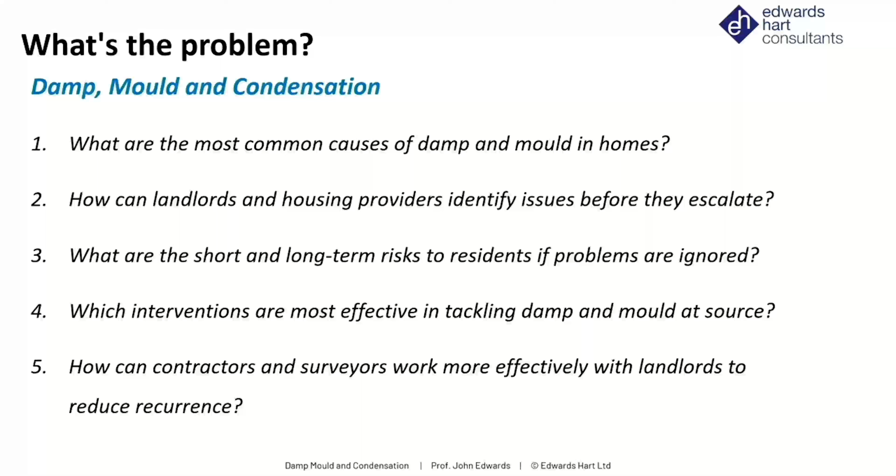We know it's a problem. It's in the news all the time. You don't have to look very far, perhaps every week, to find a new story about problems with damp, mould and condensation in buildings. I believe it's almost at an epidemic rate.

But it hasn't always been this way. Some people ask me when I saw it get worse. Well, it's always been around - it was around in the 1980s, but during the 1980s is when I saw it get worse. That was when we took out the old timber and metal windows and replaced them with plastic windows with draft proofing, removed the fireplaces, and installed a couple of fans. That's when I saw the situation get worse, and it's very, very bad today in many circumstances.

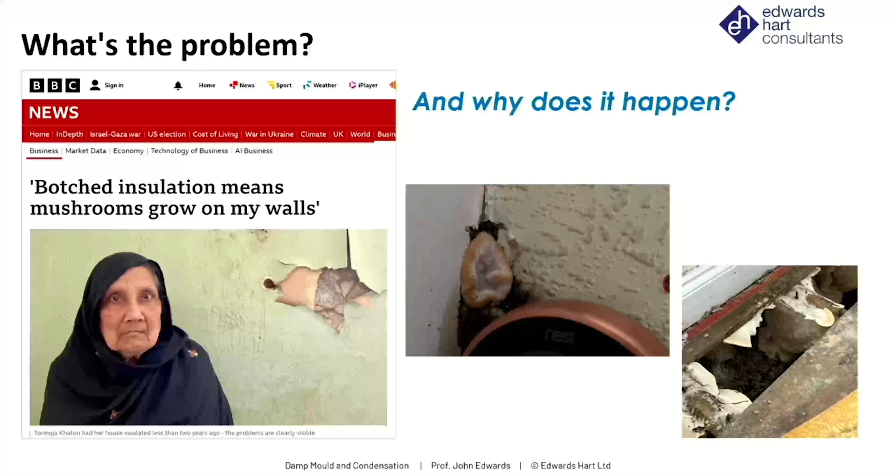This has raised the profile. This very sad death of an infant child has really raised the profile of this epidemic problem. This person isn't the only one to have died from mould issues, but it's the one that's really going to change things. It's bringing about a law that we call Awaab's Law.

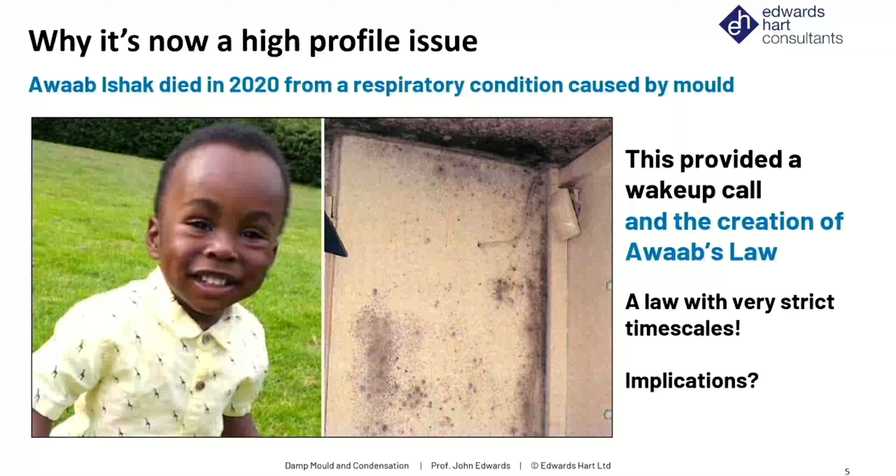Within Awaab's Law we have very, very strict timescales to comply with - or rather, social landlords have very strict timescales to comply with. And there are some implications for that. First, let's look at what these timescales are.

An investigation must commence within 10 days of the reported or known damp issue. A written summary of the investigation findings shall be reported to the tenant - it's almost as if the tenant is now the client - within 3 working days of the conclusion of the investigation. The summary must include the name and job title of whoever investigated the problem, so that person will most definitely be in the spotlight. It must also include details of any hazard identified, the next steps, an anticipated timeline for repair, and a schedule of works to be developed.

Relevant safety work must commence within 5 working days of the investigation's conclusion, and steps to undertake further work necessary to prevent hazards reoccurring should begin within 5 working days of the investigation's conclusion. But if this isn't achieved, it must be done as soon as possible and physically commence within 12 weeks. If the hazard is judged an emergency, work must commence within 24 hours.

Any work is required to be completed within a reasonable time period. And the last point is very important, I think. It's important to maintain accurate records so you can defend yourselves in the future, if you are a social housing landlord, that you've done what you can within the specified timescales.

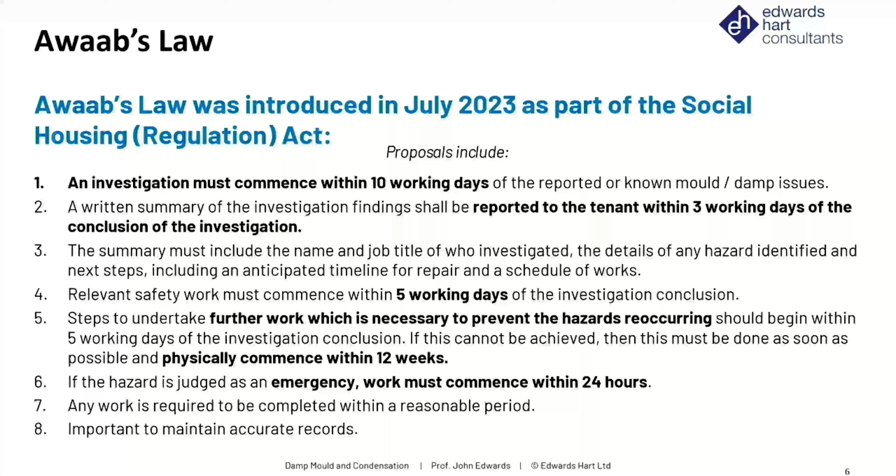So my conclusion from this, some people may have a different take on it, but the maximum timescale for initial work to commence is 15 working days from the hazard being reported. This does not have to be all the work necessary in order to prevent the hazard reoccurring, but this work must begin within 12 weeks.

Now, for many organisations, that is a very tight timescale. In fact, you could say that all of these timescales are pretty tight. Having to include the name and job title of who investigated the problem places great responsibility on the individual who has undertaken the analysis. It might suggest that should a dispute arise, their credibility and expertise will be under the spotlight. I would also say a qualification in the subject could assist in evidencing their credibility, and that's something I will talk about towards the end of this presentation.

Note that the initial reporting by the tenant could involve comments made verbally to anyone within the landlord's organisation, for example, maybe somebody servicing the gas boiler.

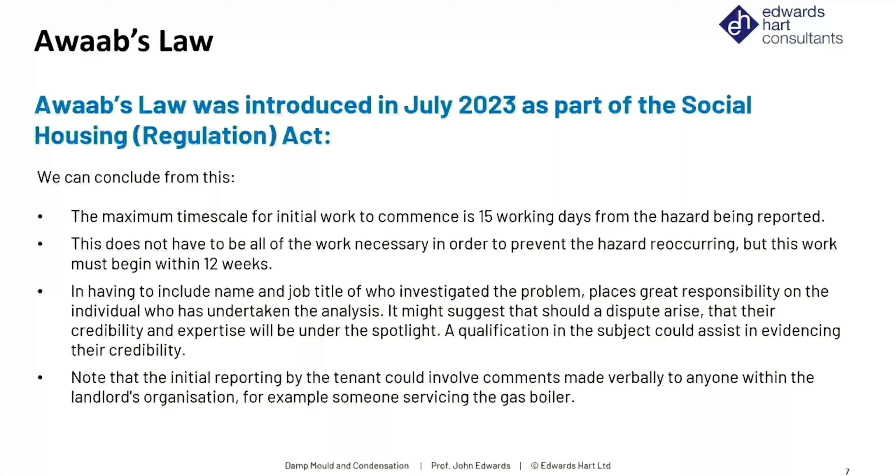But what is damp, mould and condensation? Let's try and break it down into finding out what it is. Number one, you could say it's moisture levels above the thresholds for each material type causing damage. So all materials in a building will have a different threshold at which moisture is a problem in terms of deterioration of that material or a lack of performance. That's something we'll come back to in a moment.

Number two, it could be penetrating through walls. Three, rising through walls and floors. Four, leaks through roofs. Five, leaks from pipes, drainage, and anything that contains liquids that leaks. And six, low surface temperatures leads to high levels of relative humidity. And if the relative humidity is 100%, then we're going to get condensation. But even if it's at a lower level, it could also be a problem in terms of mould.

That brings us on to number seven. Persistently high levels of relative humidity on surfaces increases the risk of mould. And eight, low heat, low temperatures inside buildings increases risks of low surface temperatures. And nine, a lack of ventilation generally in a dwelling increases the persistency of high levels of relative humidity.

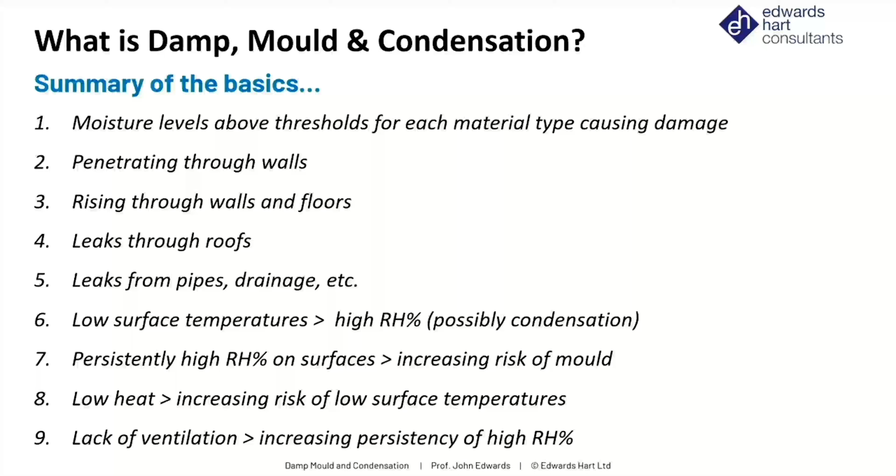So going back to that number one item in the last slide, I mentioned that different materials can cope with moisture in different ways. If we look at this table that is based upon a BRE document of a few years ago, we can read the column titled Materials, and then we can read the column titled Investigate the Cause. That indicates for timber that if you determine it has an 18% moisture content, that's too much, because that's the threshold at which moisture could be a problem.

But if you look down that list of materials, you find we got much lower threshold moisture percentages at which moisture is a potential problem. And if we go right down to the bottom, we see plaster is nowhere near 18%, it's 2%. Now we can only use this for guidance, only for guidance.

But when it comes to determining the amount of moisture present, then we need to use the right tools and equipment, which I'll come on to in a moment. For timber, we're going to use that 2-pin moisture resistance meter. But we're not going to use that equipment on any of these other materials because it will normally exaggerate the amount of moisture present. So for plaster, for example, we'd have to use a carbide test, which means extracting the material from the actual plaster itself and analysing it.

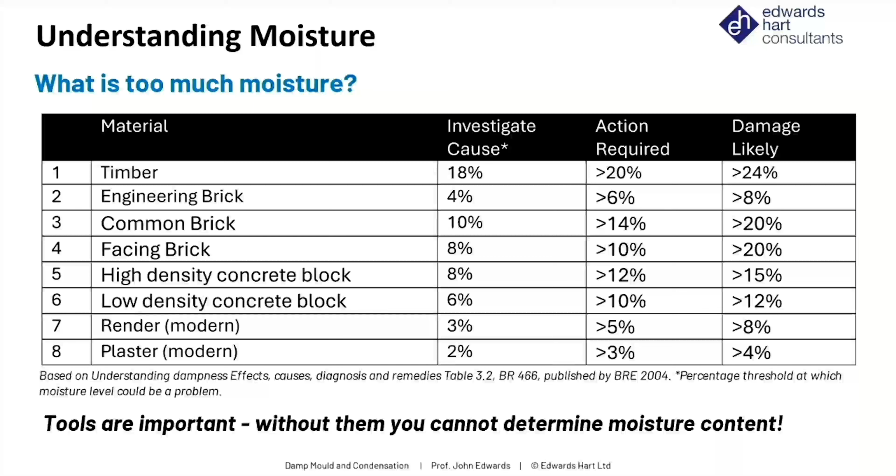The most important tool is you, the investigator, the surveyor - how much you know, what your expertise is, what you can see, what you can hear, what you can smell, tap, thump, stamp, what does it sound like? All of those things, plus using equipment.

But one piece of equipment that will be useful to you all of the time is the vane anemometer with a hood to test the fans. I'll give you an example of how important this is.

A good few months ago, myself and my colleague were doing a reconnaissance survey of many homes. It was supposed to be 100, but we couldn't fit it all in terms of our capacity. So we did an external inspection of the homes - this is social housing - and then we went inside 12 properties in a day.

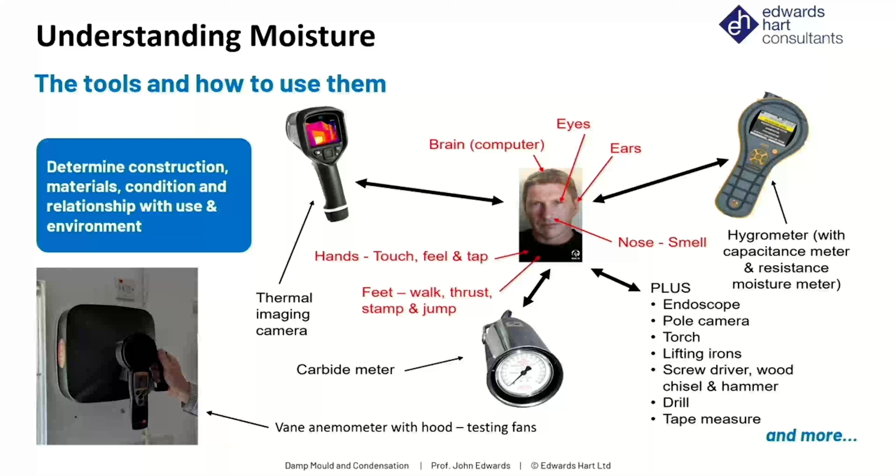So what I'm trying to explain is that this is a complex issue when we're trying to apportion responsibility, and that's what we've got to do with Awaab's Law and other laws. So we've got to be able to actually analyse things properly, and you can only do that when you are using the most correct and appropriate equipment, and also follow a process. So this is my process for damp, mould and condensation investigations.

The stages from 1 to 10 are detailed in those green boxes. If you look at the black boxes, most of them leading into those green boxes, you'll have a good idea what this entails. This is what I teach in my course on damp, mould and condensation for the Environment Study Centre, which achieves a Level 3 award qualification in damp, mould and condensation.

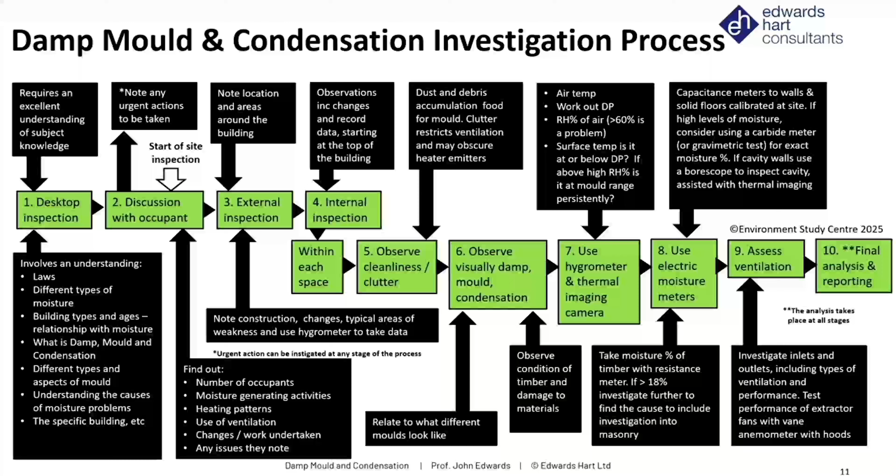What I want to do is briefly take you through these stages so you can see what's involved in undertaking a proper investigation. Starting with your investigation before you ever go to the building, when you're doing all these things, you're taking information, you're making your observations, you're thinking, you're joining up the dots. You are investigating at every single stage until you get to stage 10, where you're doing your final analysis and reporting. So the first thing we do is that desktop inspection.

And you can see what it involves: understanding laws, understanding different types of moisture, understanding building types of different ages and their relationship with moisture, understanding what is really damp, mould and condensation, different types and aspects of mould, understanding the causes of moisture problems. And of course, most importantly of all, you need specific information about your particular building that you are investigating. Not just the building itself, but its setting, its environment, the geography around it, and its location generally. And that requires an excellent understanding of the subject matter.

And once we've done all that, bear in mind, the better the pre-inspection is, the better the desktop inspection is, the more effective we will be when we get to the building itself, and the more economic we will be with our time. So we start our site inspection at stage 2.

The first thing we do is have a discussion with the occupant. We want to find out their side of the story. During the desktop inspection, we may have ascertained that this has been done, that's been done, or this has been resolved and that's been resolved. What is their side of the story? What do they know about these issues? Will their story be different to the official one you researched into files? And also find out from them the way they are occupying the building, and if they know of anything they think is important enough to say needs to be resolved now—we're talking about urgency. If anything urgent is to be undertaken, then you can deal with that straight away.

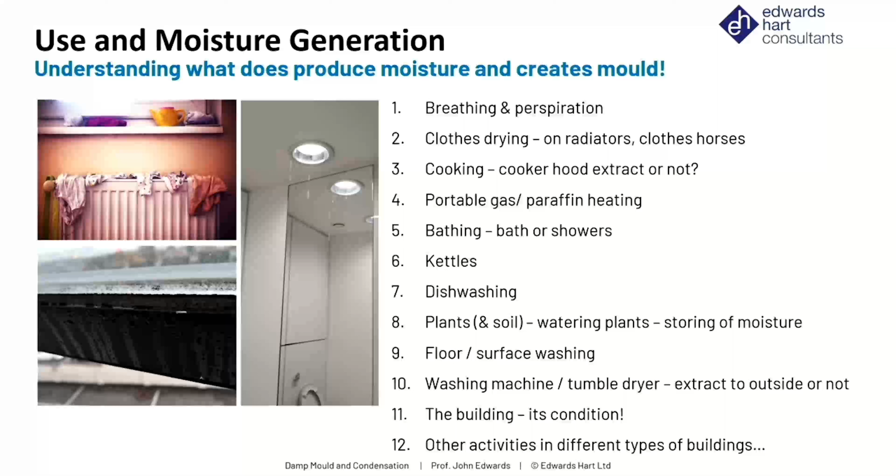So when it comes to looking at the way occupants are occupying buildings, we're looking at moisture generating activities. The greater the number of moisture generating activities being undertaken, the greater the moisture being produced will be. What we're looking for really is moisture generation that is above the norm. We're looking at the number of people, we're looking at what they're doing, but we're also looking at other things as well. If you've got water leaking through a roof, that's going to increase the amount of moisture in the building. So we've got to understand that.

What we must also be doing is working to authoritative standards, authoritative documents. And the most authoritative standard in the UK for dealing with moisture in buildings is BS 5250/2021. That's the one I use. That's what the course I've told you about is largely based upon.

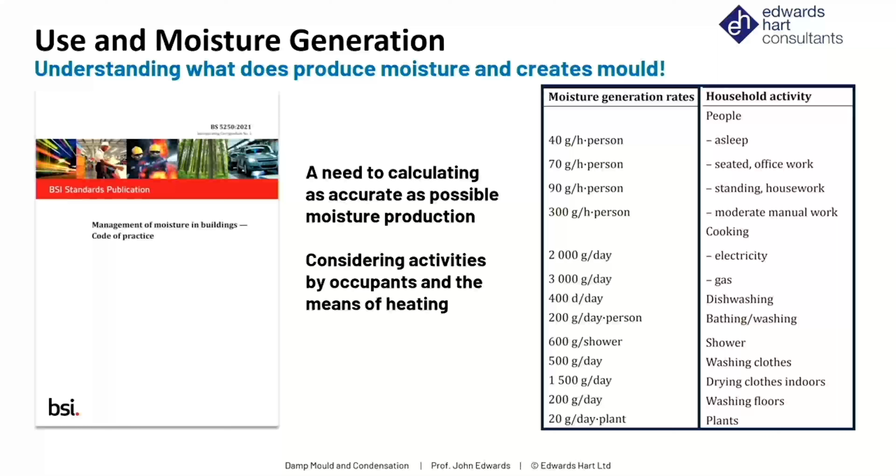In that particular document, it indicates that you need certain information from the occupants of buildings. It says, words to this effect, you need to write down the questions you're going to ask the occupants when you arrive in a building, and you've got to note those answers. If you then work to information contained in BS 5250, you can actually calculate the amount of moisture being generated. It will not be accurate—you're relying upon what you're being told—but you'll have some idea of the amount of moisture being produced, and then you can compare it with other dwellings you're going into, and how the quantity of moisture produced compares to the condition you're finding in your dwelling. So that is a very important part of the analysis.

Of course, we're looking for overcrowding, aren't we really? Overcrowding is creating too much moisture. And one of the problems we have with ventilation when we construct buildings is we take a one size that fits all approach to ventilation. And that is not the approach we should be taking. Calculating this information can help us work out what ventilation we really do need in a dwelling.

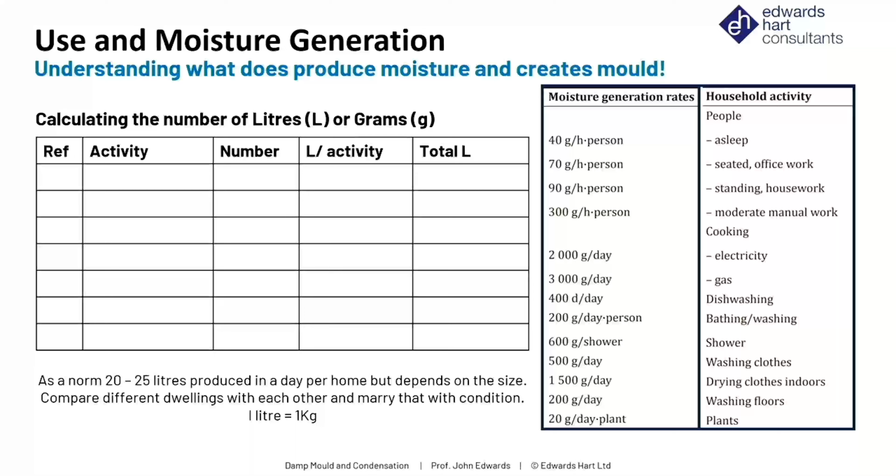And once we've done that, then we'll start with our external inspection. That external inspection isn't just the building itself, but also the location around the building, the geography around the building, and also taking data—using the hygrometer, taking data such as temperature, relative humidity, absolute humidity, and so on and so forth.

And once we've done our external inspection, we'll start internally. Internally, we'll be making our observations, including the changes which are taking place. Again, we're collecting data, and normally we'd start at the top of the building. Then within each space, we undertake the activities which are explained in stages 5, 6, 7, 8, and 9. So when we go into each interior, that's what we'll be doing—making our observations about dust, debris accumulation. That's important because dust and debris provides great food for mould to grow. We'll be looking for clutter.

Clutter is important to understand because it may restrict the circulation of air around the building, and you could get stagnant air at the back of furniture placed against the enveloping walls of the building, or obscuring heat emitters. So we need to do that in each particular space we go into.

And also in each particular space we go into, we must do a visual inspection for damp, mould and condensation, and we can relate to what we're seeing in terms of mould to a library of different mould types to get to understand, as best anybody can, what mould we are actually seeing in front of us. That will not always be accurate, but we're going to have a go at doing it.

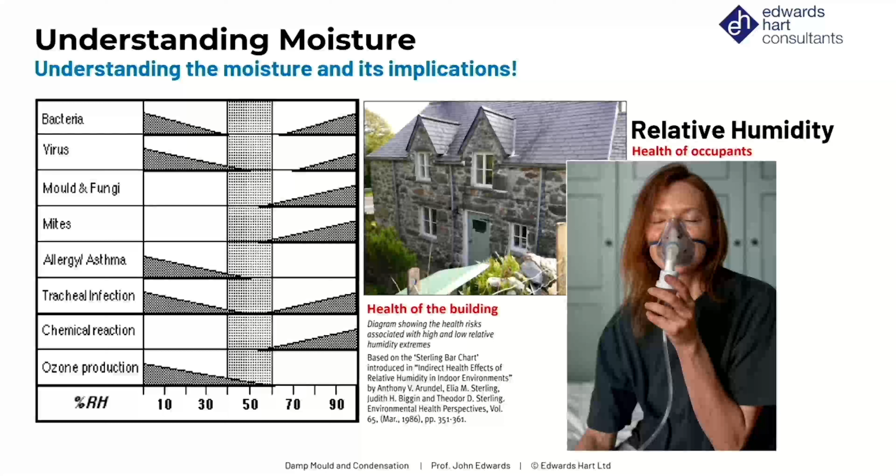And if the post-occupancy evaluation indicates that, oh yes, the relative humidity levels are too high, if they can't compare it with data taken at this particular stage, they don't know whether the retrofit project is the reason why the situation's worse, or it was not too good in the first place, or hasn't made any difference. You've not got a full picture. So it's very important, anybody doing any investigation of a building for whatever reason, to take this data and use the right equipment.

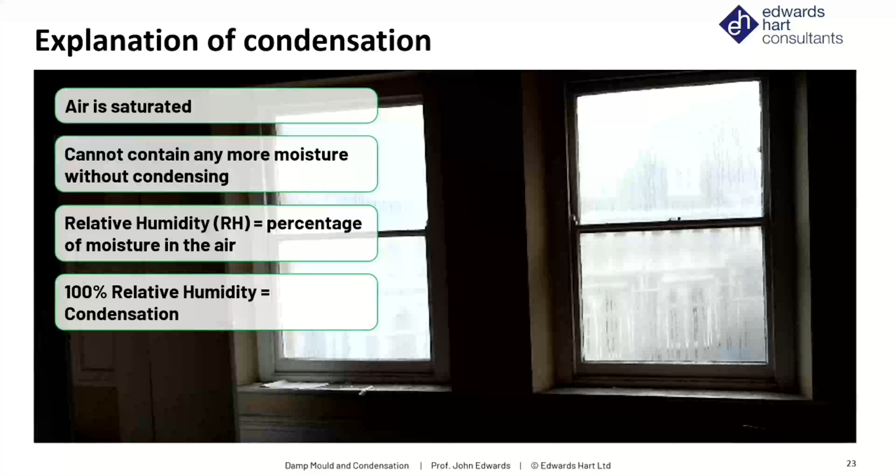So what is condensation? I've already briefly mentioned it. Condensation is when we've got too much moisture in the air. Condensation is when we have 100% relative humidity. We know that as dew point. That is the saturation point, when the air cannot contain any more moisture without it condensing, without condensation occurring. That's what condensation is.

But what about condensation on the inside face of glazing and other cold surfaces? I've already mentioned that the highest level of relative humidity inside a dwelling should be 60%. But if that air with moisture within it meets up with a surface such as the inside face of a single pane of glass, where the surface temperature is at or below the dew point, then the air will go from 60% to 100% instantly. That's when we get condensation on that glazing, when the air is cooled on meeting that cool surface to the extent that condensation occurs, because the surface temperature is at or below dew point.

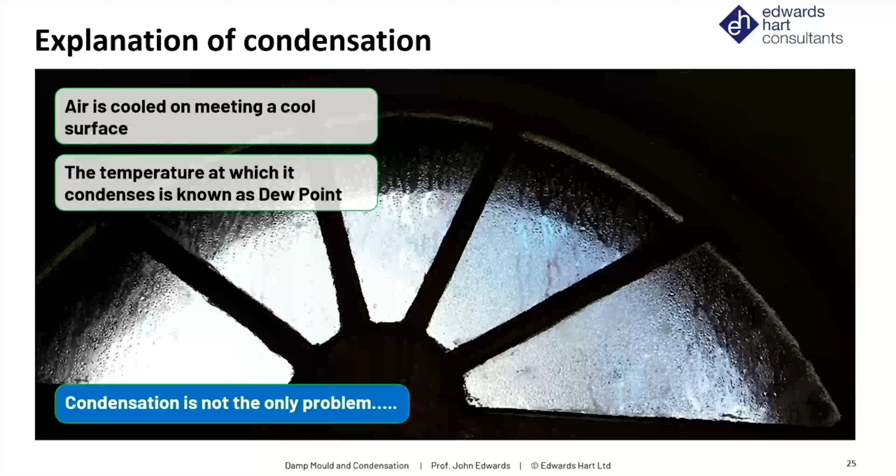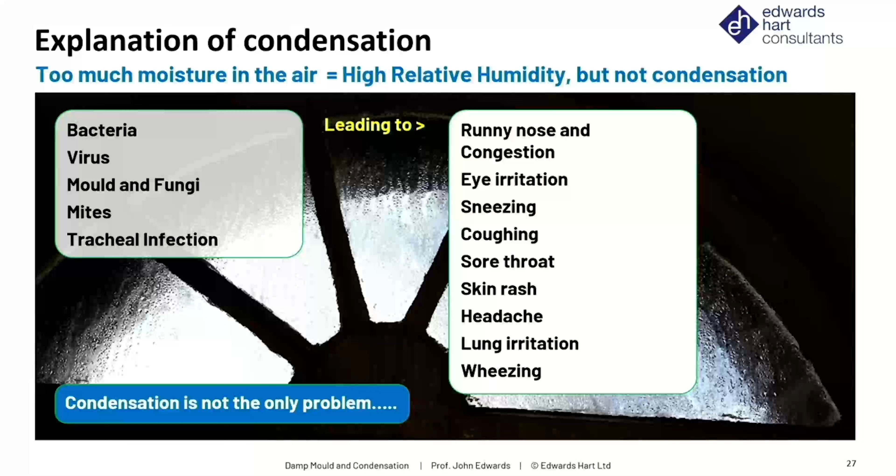But condensation is not the only problem. High levels of relative humidity, even if they don't reach 100%, is a problem. High levels of relative humidity can give rise to bacteria, viruses, mould, fungi, mites, and so on. And that can lead to ailments such as runny nose, congestion, eye irritation, sneezing, coughing, a sore throat, skin rash, headache, lung irritation, wheezing, and so on.

Let's look at this chart. Condensation is not the only problem. If we look at row 1, that's the saturation point - 100% relative humidity, we have got condensation. But you don't need condensation for mould to grow, because if you look at row 3, 90% relative humidity is enough for mould to start germinating. And if we never see 90% again, but we see 70% most of the time, as in row 6, that is enough for mould to start colonizing, and it will sustain itself if we have 70% relative humidity most of the time.

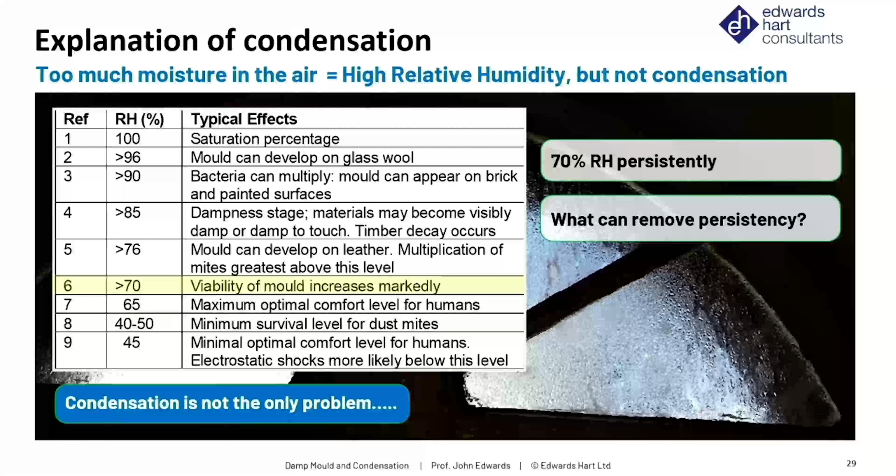So what can we do to remove this persistency of high levels of relative humidity? Think about it. It's something we've mentioned already. Yes, it's the V word - ventilation. Ventilation will reduce the persistency of high levels of relative humidity on surfaces. So that's what we need - we need to make sure we've got decent ventilation.

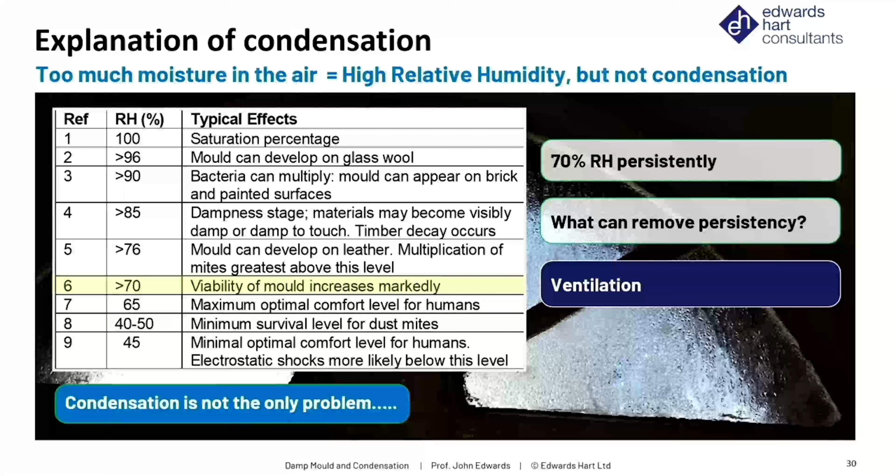In this example here, I'm highlighting that the hygrometer is picking up the fact that we have 100% relative humidity. We've reached dew point, we've reached saturation point, we have got condensation. And the temperature at which we've got that dew point is 12 degrees Celsius, so the dew point temperature is 12 degrees Celsius. The warmer the air, the more moisture can be held within it.

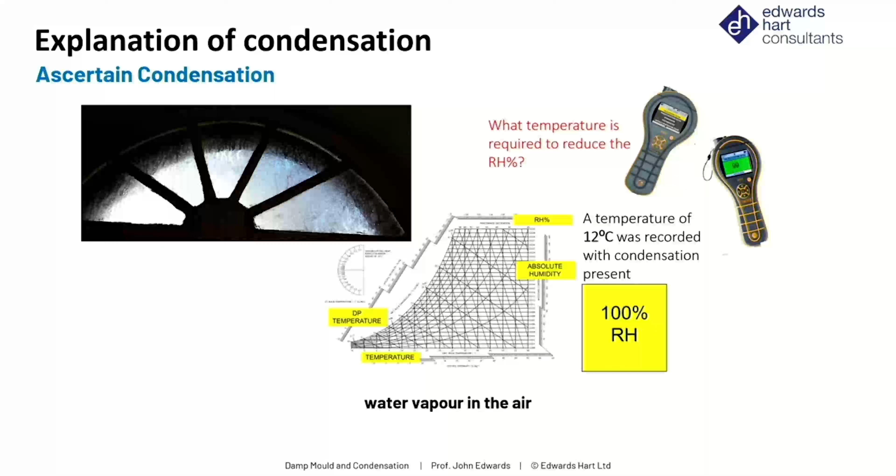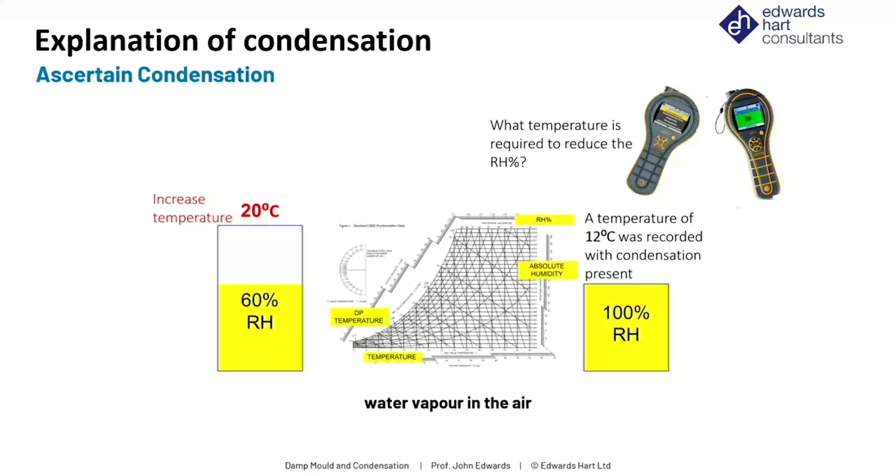So if we increase the temperature, we will reduce the relative humidity level. The question is, what temperature do we need to reduce the relative humidity level down to a safe level, which would be 60%? The psychrometric chart will enable you to calculate that. It's calculating that if we increase the temperature to 20 degrees Celsius, the relative humidity will go down to 60%. But it's got to stay at 20 degrees Celsius. If it doesn't, if it goes down to say 15 degrees Celsius, then the relative humidity is going to go up to 83%. And if it keeps on going down to the dew point temperature, 12 degrees Celsius, then again we've got condensation.

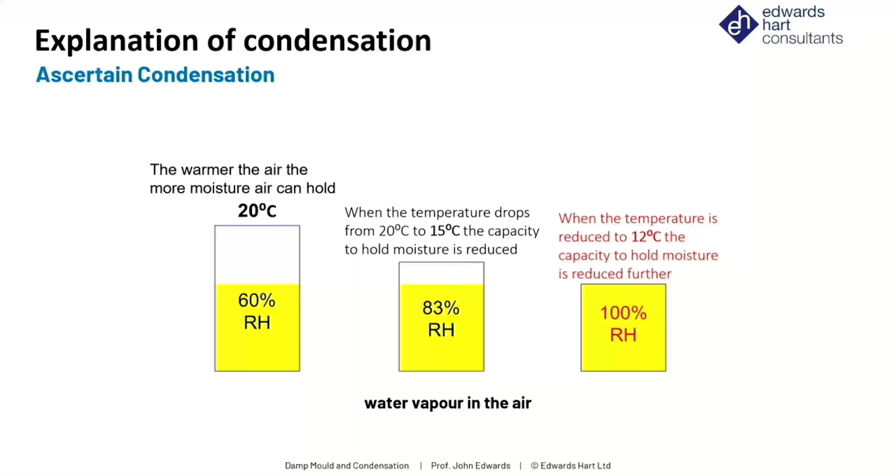Now, the psychrometric chart is so important for us to understand these issues because it helps us understand how all these things relate to each other. So on the bottom horizontal line, we have temperature. On the top horizontal line, we have the relative humidity. On the curved line, we have the dew point temperature. On the vertical line, on the right-hand side, we have a representation of absolute humidity.

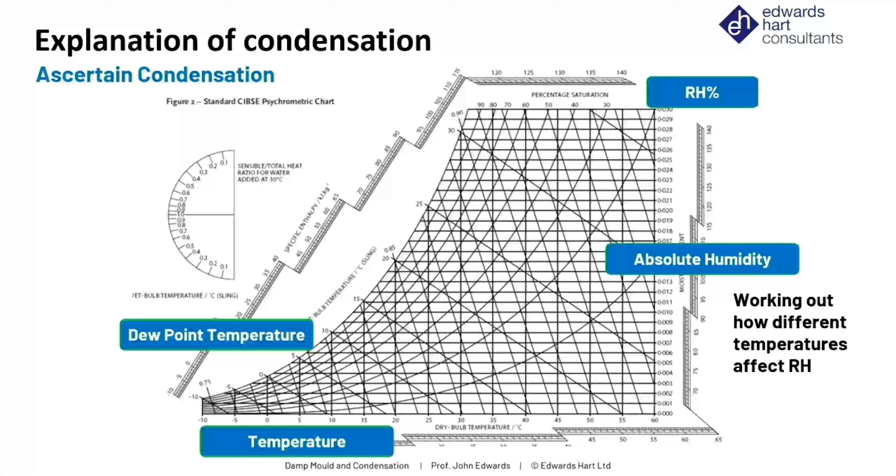Working out how different temperatures affect the relative humidity - the hygrometer is going to give us the data to start this process off. The hygrometer allows us to place information on this chart: temperature at 12 degrees Celsius, relative humidity at 100%, so we got condensation, a dew point temperature at 12 degrees Celsius. That's what we've got. And so if we want to bring that relative humidity down to 60%, you can see we mark 60%.

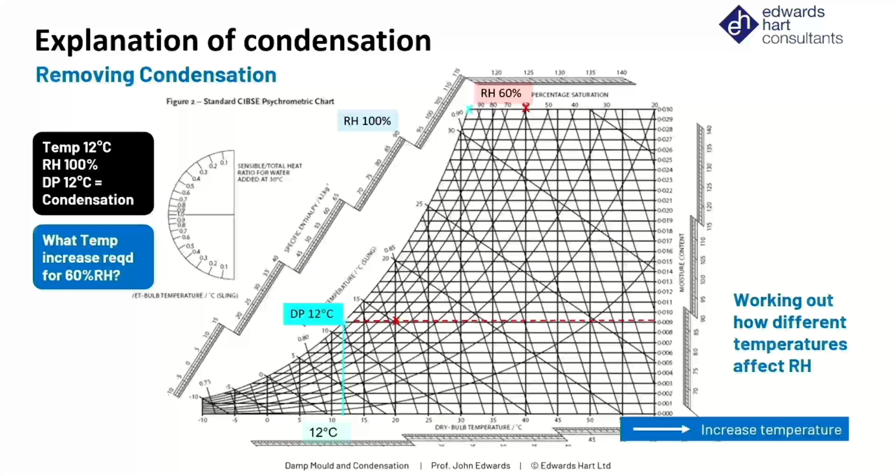If you follow that curved line down, starting at where we got that red cross of 60%, follow it down, concentrate now, and then you come to that axis along the horizontal dotted line, and then if you go down that vertical line, you come to 20 degrees Celsius. It's working out for us. That's how it works - increase the temperature to whatever it is to bring down that relative humidity from 100% to 60%. So this is what helps us work things out.

And it's very important that we understand this, because when we go into a property and we find we've got high levels of relative humidity, we've got to state what the temperature is, because it could be - it's bound to be to some degree, to a great degree - that it's because we've got a low temperature.

And what we can do is work this out, and then we can put it into our report to give a more complete picture of the situation.

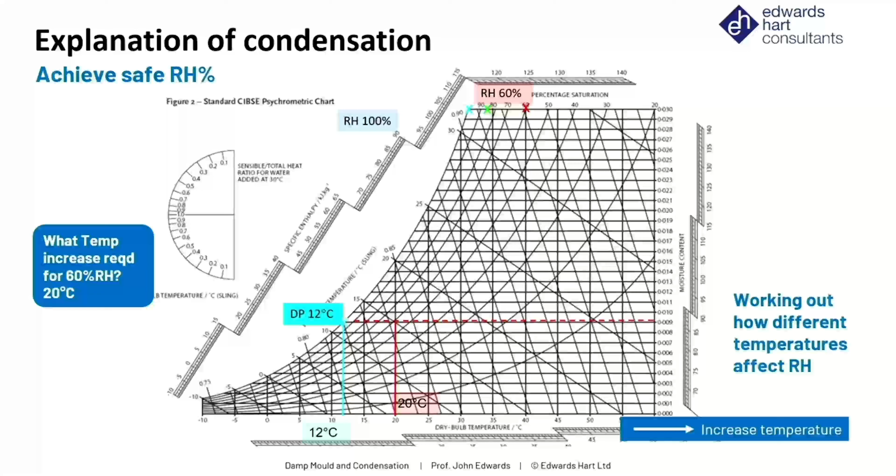But we do not need to use a psychrometric chart when we go into a building. We can use an online calculator, which are free to use, free to download. There are many of them.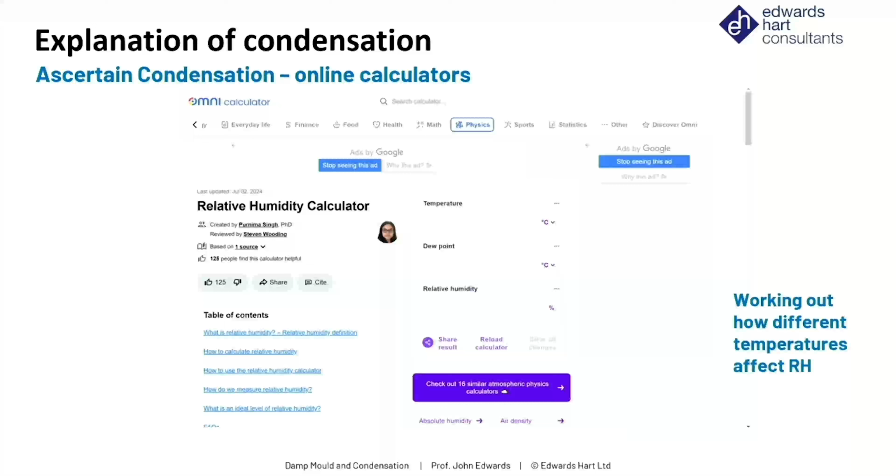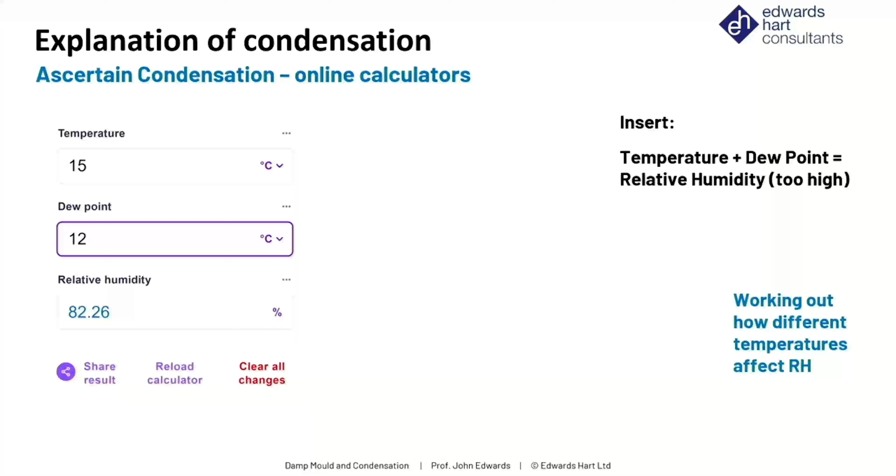So here you can see, if we insert temperature and dew point, that will tell us the relative humidity is too high. So if we want 60% relative humidity, we insert 60%, press enter, and it tells us we need a temperature of 20 degrees Celsius. So it's quite simple and straightforward to use.

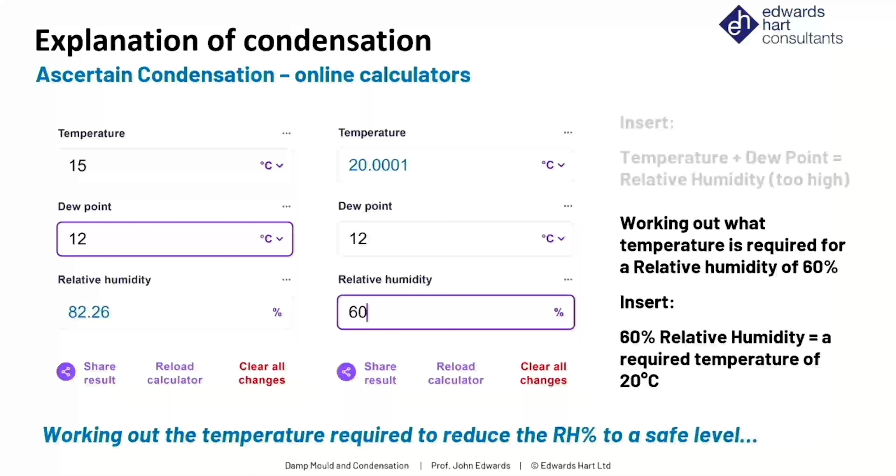Let's think about thermal bridging. All buildings have a thermal envelope. Any weakness in that thermal envelope is known as a thermal bridge. A typical thermal bridge may be a window, say with a single pane of glass.

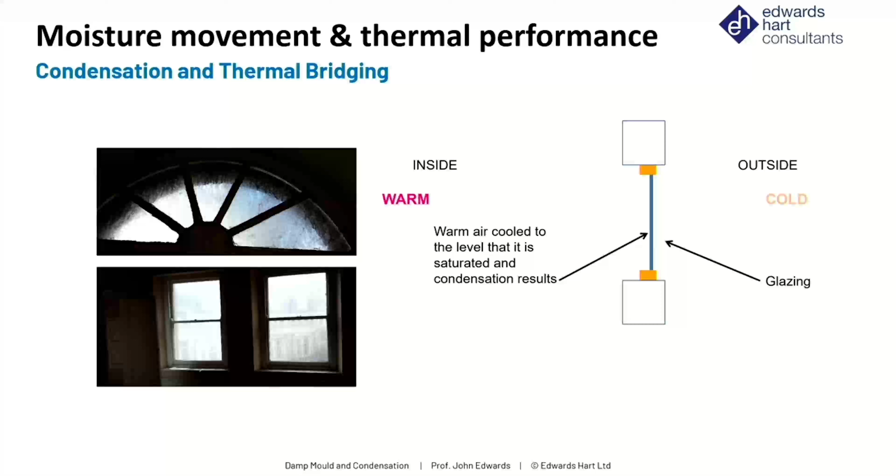That is the weakest point. But of course, many buildings these days do not have windows with single panes of glass. We have single glazing, yes, but we may also have double glazing, triple glazing, secondary glazing. So it could be that the weakest point is now somewhere else.

That somewhere else could be the window reveal, location A. Why is that the weakest point? If you look at the distance from location A, the window reveal, to the outside face of the wall, the distance isn't that great. Compare it with location B, the flat plane of the wall internally - its distance from the outside face of the wall is much, much greater. So the external temperature is going to have much more influence over what's happening at A compared to B.

So the strength of the thermal bridge is the relative difference in heat loss between different locations. The weakest area of greatest heat loss is the thermal bridge, but it's the relative difference that determines the strength of that thermal bridge.

There are things that could increase the thermal bridge at location A. For example, moisture in the wall itself - moisture is a conductor of heat. Let's think where that moisture may come from.

What about the window frame and its join to the masonry opening? What sort of join is it? Is it just a gap where water and air can go in and out? Is it a seal joint, which is fantastic? Or is it a seal joint that started to break down? If that's the case, water may get in and find it difficult to get out, increasing moisture in that part of the wall, increasing heat loss, and strengthening the thermal bridge.

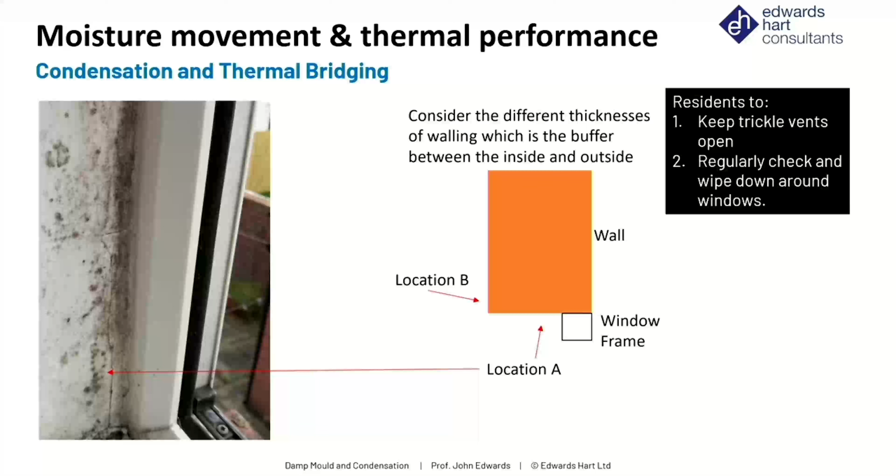Why have we got high levels of relative humidity on the surface of the reveals in a traditional building? Because we've applied an impermeable finish. If you had the original lime plaster in that location, lime plaster, like many other traditional materials in traditional buildings, is both vapor permeable and hygroscopic, which means it absorbs moisture from the atmosphere when we've got high vapor pressure, and that moisture then evaporates outwards and leaves the plaster when we've got lower levels of vapor pressure. So there's almost continuous movement of moisture back and forth rather than stagnant moisture on the surface. So in an older building with lime plaster present, the incidence of mould growth in this type of situation should be far less.

What we've just looked at is what you can see in A. The window frame is on the outer face and we have a strong thermal bridge. If we look at B, think about it. It's different, isn't it? The window frame is now set back from the external face. So the question for you is this: we will have a thermal bridge in B, but is it going to be weaker than A, stronger than A, or just the same as A? Think about it. Work out the logic based on what we've been talking about so far.

It's going to be weaker because there's a greater distance from the window reveal to the outer face, a weaker thermal bridge. Where we've got C, a cavity wall, without any cavity wall insulation, there will be a thermal bridge because that is the weakest point. There's greater thermal conductivity from the window reveal rather than the flat plane of the wall, because in the flat plane of the wall you haven't got solid masonry going straight through, you've got a gap in the middle.

And in D we can see that the cavity wall insulation has been installed. So think about this now: the thermal bridge in D, is it going to be the same as C, weaker than C, or greater than C? Think what gives the strength of a thermal bridge. It is the relative difference of heat loss in different locations. The thermal bridge is alongside the window frame, the same as C, in that same location, but will it now be stronger, weaker, or the same? Bearing in mind, part of this wall now, not at the window reveal, but the other part of this wall, the flat plane of the wall, has now been insulated.

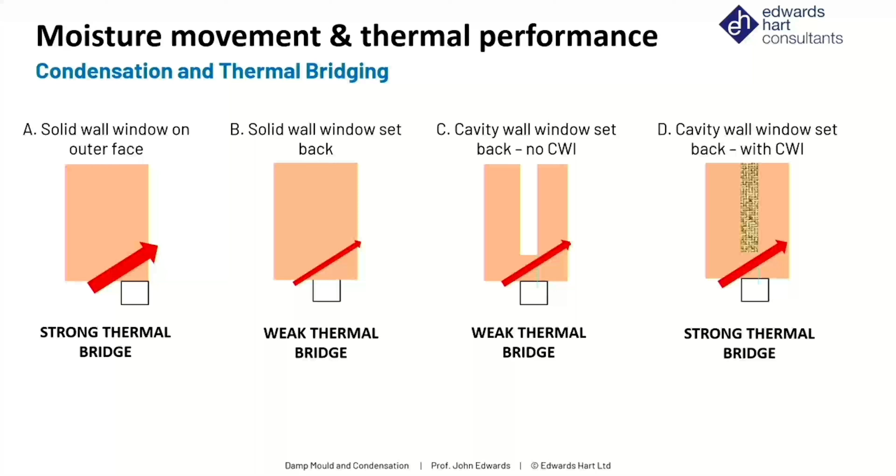We'll have a stronger thermal bridge because the relative difference is greater. So what does this mean for the risks of mould growth? It might not mean an awful lot, if there's good ventilation. But it does mean there's a greater risk of condensation and mould growth on the window reveal. We need to understand that is a risk that will happen when we install cavity wall insulation.

If you're going into a dwelling and you've noticed the window reveal has mould growth on it, you ask the occupant, when did this start? They might say, 5 years ago. You might say, anything else happened 5 years ago? And they might say, oh, well, we had cavity wall insulation installed - and there you have it, because that triggered it. So we need to treat an investigation that sort of way.

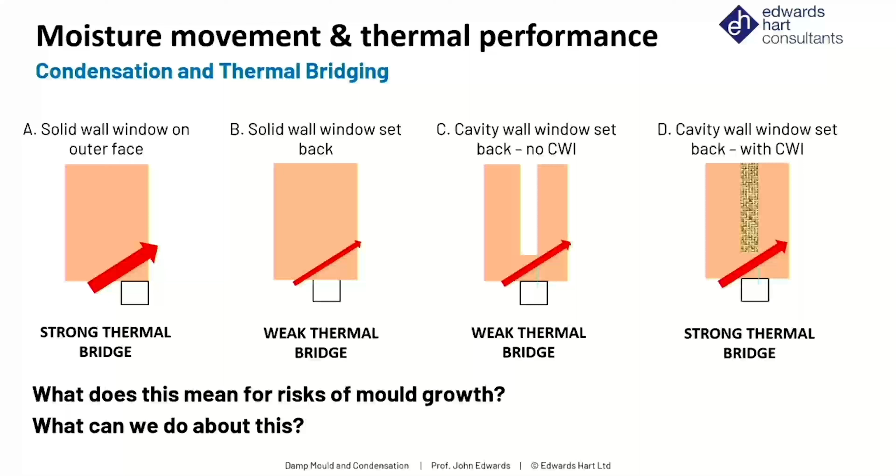So what can we do about this? Well, we can insulate the window reveal, can't we? That will sort it out. It may not need much insulation, it may need just an insulated wallpaper or something of that kind. What I'm trying to say is we need to factor in that this is what can happen, and this is part of our investigation.

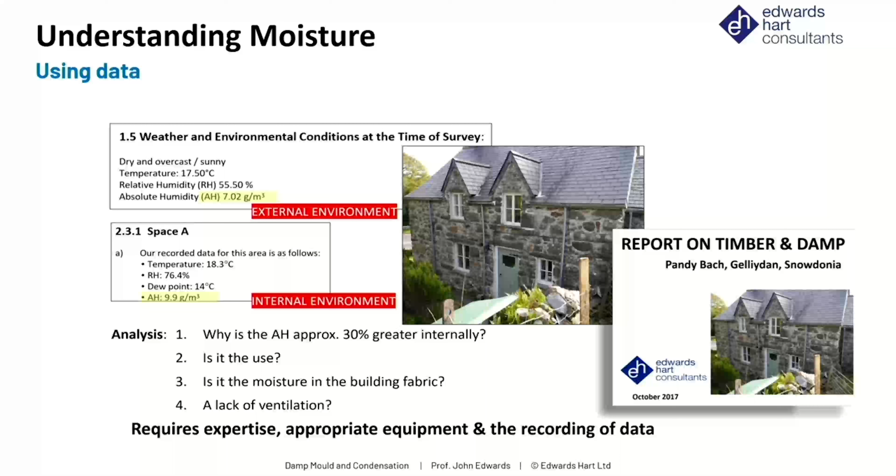Inside, it's around about 10. That's a big difference between the outside and the inside, so we've got to analyse these figures. Why is there that difference? Why is it around about 30% greater moisture in the air internally compared to outside? And that leads us into thinking and analysing certain things like, is there too much moisture generation inside this building? Is there a lack of ventilation, or is it both those things? Is the building fabric heavily moisture laden? We've got to use this data to instigate our investigation into that particular point.

This is a diagram representing a plan of this building. If you look at it very closely, look at the annotation starting in the top left-hand corner: visible damp on floor. Lounge, nearly all skirting boards having moisture content above 20%. High moisture in walls up to 300 millimetres from floor level. High moisture in walls up to about 750 millimetres from floor level, and so on and so forth.

What does that tell you straight away? It tells you that the building fabric is heavily moisture laden. Bear in mind, this is not just on a hillside, this is on a mountainside in the highest peak in England and Wales. Buildings which a couple of decades ago would not be suffering the consequences so much from water running off the mountainside are suffering a lot today because of climate change. Much heavier rainfall for longer periods of time means there's a lot more water coming off a mountainside running into buildings like these. One of the things we're recommending here, as we recommend in many buildings in this situation, is putting land drainage in to take water away from the building.

Water just runs into the walls of this building. The building fabric is heavily moisture laden. Think about some other analysis and using data.

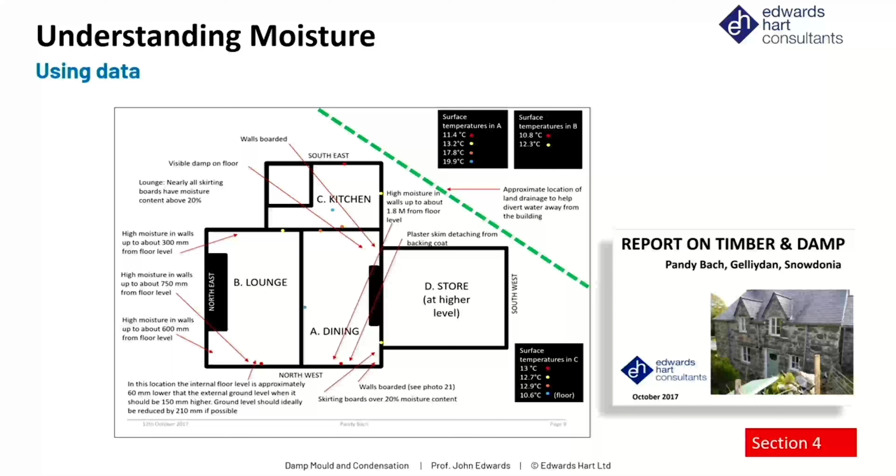So let's continue by looking at this process. Now we're at stage 8, using electrical moisture meters. If you look at the top right-hand corner, we're talking about capacitance meters to walls and solid floors calibrated on site. If high levels of moisture are ascertained, consider using a carbide meter or the gravimetric test for exact moisture percentages in such building fabric. If we've got cavity walls, we need to use borescopes to inspect the cavity, all assisted with thermal imaging. So we need to use the right equipment.

Then we have to assess ventilation, doing everything we're saying in the bottom right-hand corner, but also testing those fans with a vane anemometer.

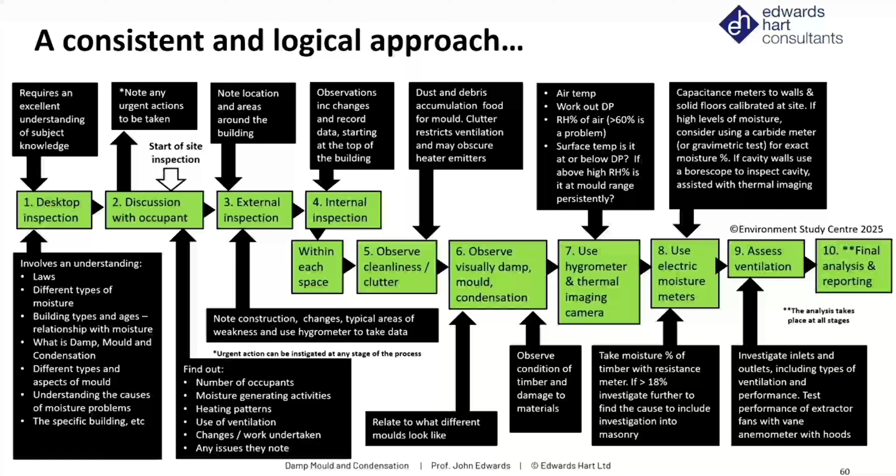And then we get to the final stage. At all these stages, from 1 to 9, we are continually analysing the situation until we get to stage 10, where we do our final analysis and we write a report. Hopefully the report will say: we know what the situation is, we know what the problems are, we know what the causes are, and we know what to do to resolve them. Hopefully the report will say that. But sometimes it will not be able to, because we still don't know enough about a building. I can go back to my time in 1981 when I first started environmental monitoring of buildings.

I was using the sort of tool or equipment you can see on the left-hand side of the screen: a thermohygrograph, which collects temperature and relative humidity. You leave it into a property for a week.

You go back, open up the graph paper, sit down with the occupant of the building, and look at all those episodes where there was a moisture incident, where moisture was a problem. You find out from the occupant what was going on inside that building at that time. It could be, for example, that every time there's a moisture incident, it was when the bathroom was being used. So now we can hone in on the bathroom, that's where the problem is, and investigate it further.

These days we can use data loggers, small data loggers. We can have any number of them in a property, and they can do everything plus much more than the thermohygrograph does. I was working on a project in the late 1990s where these data loggers were being imported from the USA, so they've been around a long time. But the software with them these days is fantastic to analyze the data.

Those pieces of equipment can help us analyze a particular problem when we're investigating a building. But of course, as you can see on the right-hand side, the ideal situation is we monitor the building all of the time. Some organizations will do that because they want to nip problems in the bud, to determine that they've got poor environmental conditions that could give rise to mould growth issues before the mould starts to grow.

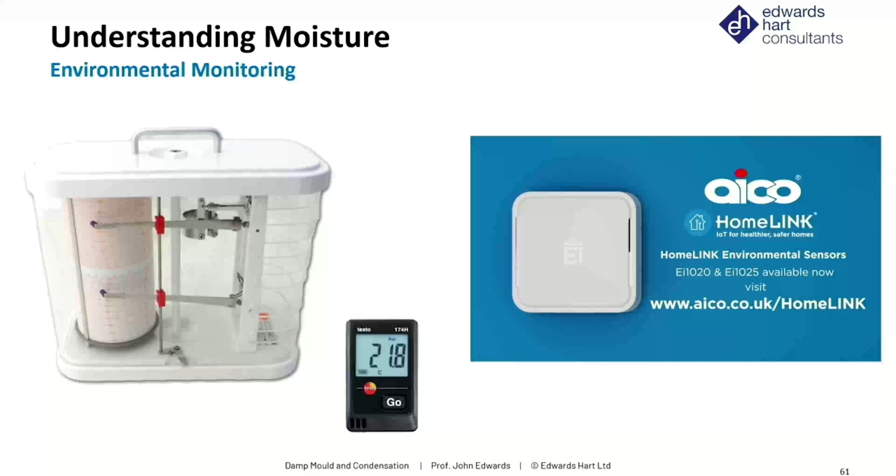The organisations I deal with, many of them have had their fingers burnt with retrofit that's caused these problems. So monitoring buildings is a way of understanding what is going on all of the time, rather than just one particular moment in time that we usually see when we're conducting an investigation of moisture in a building.

So if you look at this overall process, we have a pre-inspection, we do the site inspection, we produce our report, we finalise our proposals, we design and specify the work, we implement the work on site, has it worked. We should always conduct a post-completion evaluation, always.

Awaab's Law says you've got to do this, but it makes sense to anyway. As an organisation, for example, as a social housing organisation, you want to know whether the work you've undertaken, the approach you've taken, has actually worked.

You may determine at that post-completion evaluation that you've been brilliant, it's fantastic, you resolved it. Don't rest on your laurels. How were you so successful? What did you do so well to end up with a situation whereby you resolved the problem? Find out how you did it, because you want to learn lessons for next time.

But also look upon it this way: can you do even better next time? Can you do some things better? Can you be more effective with your resources and with the time it takes? Always look for continuous improvement.

And if you're conducting your post-completion evaluation and you find it hasn't worked, that the problem has come back, why? What did you do wrong? Find out, because you've got to put it right for next time. Learn lessons, learn how you can improve.

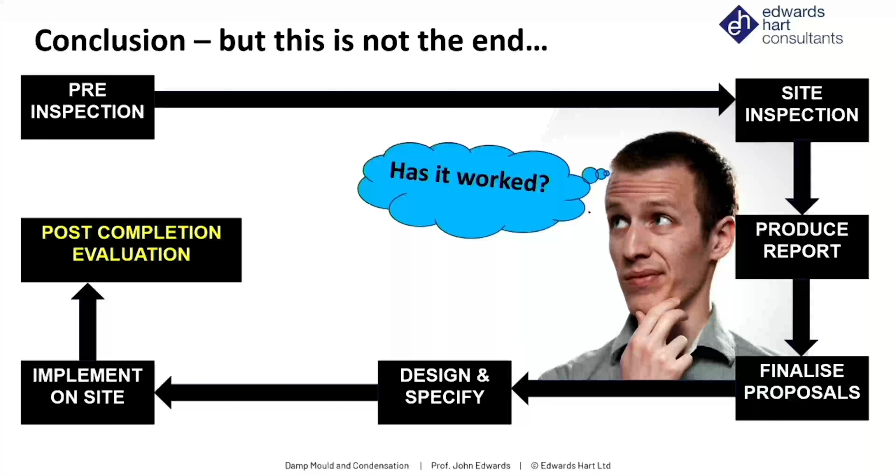And then once you've reached a stage where you do this work successfully, always look to see how you can do it better. Because resources are in scarce supply, we've got to see how we can do things better, more effectively, but also more economically as we move forward. We need to continually improve ourselves and continue to improve our expertise.

The approach I've been describing to you, if you didn't know already, is building pathology. If we look at the definition from Designing Buildings Wiki, it says that building pathology is a holistic approach to the studying and understanding of buildings, and in particular, building defects and associated remedial action.

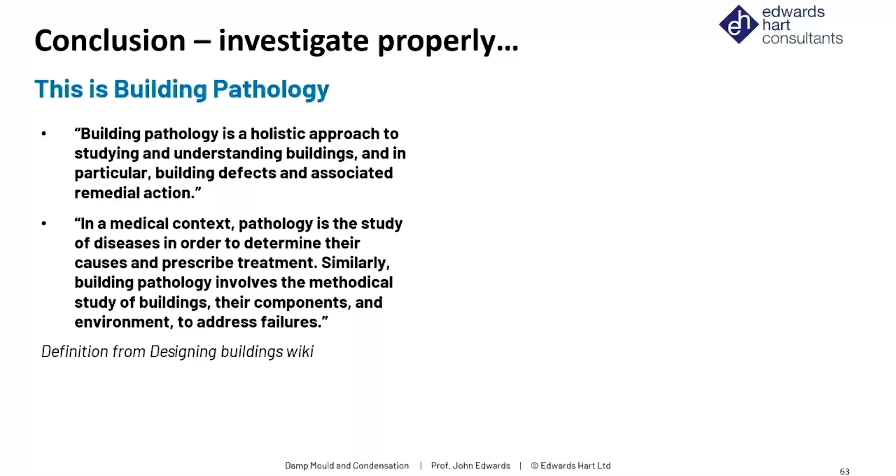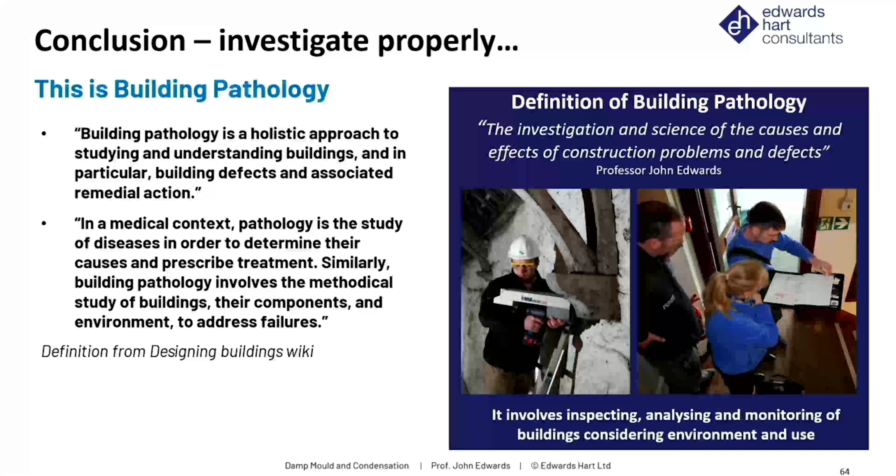In a medical context, pathology is the study of diseases in order to determine their causes and prescribe treatment. Similarly, building pathology involves the methodical study of buildings, their components and environment, to address failures. In my own simple words, building pathology is the investigation and science of the causes and effects of construction problems and defects. It involves inspecting, analysing and monitoring of buildings, considering the environment around the building and its use. That's what it is.

It's about a proper investigation, and 10 items, if you like, or reasons why it has to be building pathology.

First, it's about understanding the possibility of possible problems in a building. You've got to really have a good knowledge of buildings, everything about the building, and the possibility of things going wrong. The hardest problems to solve are the ones that you can't see, but you need to determine exist before they manifest into defects you can see, defects that affect the occupancy of the building. So it's a comprehensive approach.

Second, it's about solving problems properly. Third, it's always about finding the cause or causes of problems. Fourth, determining solutions that address the cause or causes, understanding there may be a number of options to address the cause, and we've got to find the right one for our building, our type of building, in our circumstances, in our situation and location.

Understanding that the cause may not be the building itself, but could be its use, or the environment around it. But in all honesty, very often it's a bit of everything. We've got to determine and apportion where the fault lies, because if we don't determine that properly, we will not determine what the solution should be.

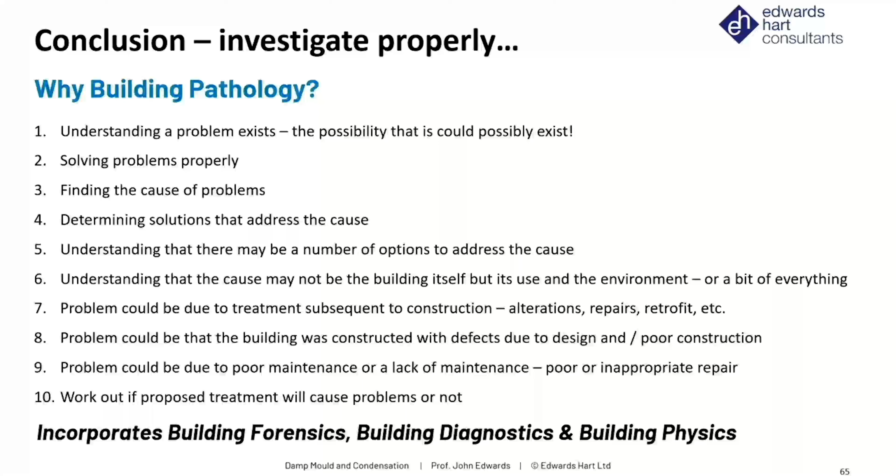So let's go back to these questions we asked at the very beginning. What are the most common causes of damp and mould in housing? Well, I would say poor ventilation, lack of heating. Why have we got poor ventilation and lack of heating? Well, you can work it out.

Sometimes buildings are just poorly equipped with ventilation. Sometimes you also have to look at the way the occupancy is being dealt with as well. A lack of heating - it could be that there's plenty of heating, but it's just not being turned on.

Building fabric in poor condition, not properly or appropriately maintained - yeah, absolutely. I see lots of properties in poor condition, ranging from gaps around windows to mortar-filled cavities which are bridging damp-proof courses and bridging the wall from the outside to the inside, leaking gutters which are overflowing, all sorts of problems - all the obvious ones any one of us who do anything to do with buildings can think of.

And poorly informed changes, including retrofit - that's a massive one, a massive one that we focus on in our 2-day course. And climate change issues - the climate is changing, and there's a whole host of things that can come under that.

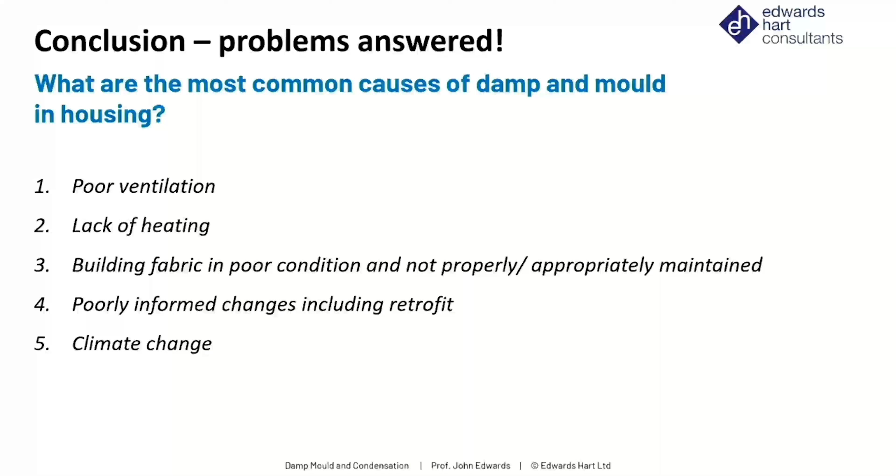How can landlords and housing providers identify issues before they escalate? Well, the first point is regular inspections by non-technical personnel - anybody going in to advise an occupant in a social housing context about money issues and debt issues, tenant liaison officers, the guy servicing the gas boiler.

We've delivered short training courses to those types of personnel to raise their awareness of these issues, so they can go in, have a little scout round depending on what their organisation wants them to do, to spot any problems, and also to take on board what's being reported to them by occupants.

That's the first point. The second point: periodic condition surveys by technical personnel, for example building surveyors, who should be taking the approach I've been describing today - a building pathological approach that includes building forensics and building diagnostics. And the third point: we need to maintain building fabric and building services so that they always remain in good condition.

Fourth point, when it comes to reactive maintenance, we need to be quick. We need to be prompt, because some of those reactive maintenance issues involve water, and we don't want any water being absorbed into the building fabric. We don't want water within spaces increasing vapour in the air inside buildings, which increases this problem of damp, mould and condensation.

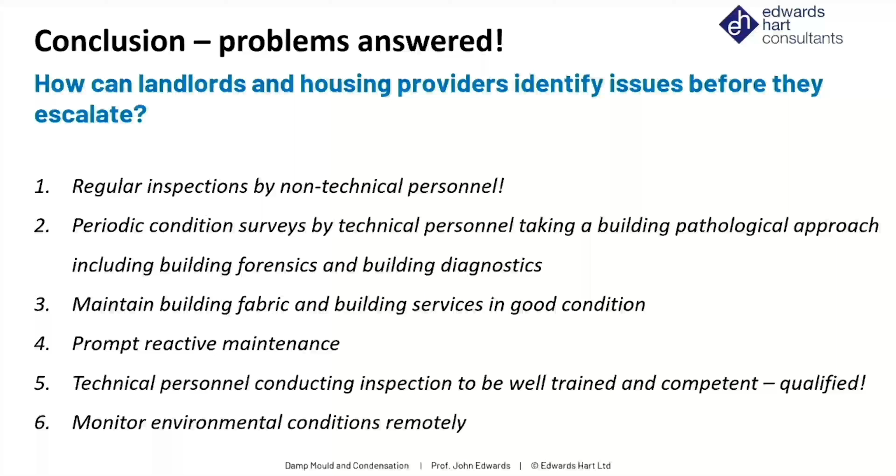And the final point, if we're really serious about this, we should be monitoring environmental conditions remotely, and then we'll know whether problems are brewing up before they actually reveal themselves into defects we can see, but also we'll understand how well or otherwise the property is being used and occupied.

What are the short and long-term risks to residents if problems are ignored? Well, I could say a lot about this, but I don't want to be scaremongering. But there's a grave risk of physical health dependent on the type of occupant.

So we look at moulds, and we're not looking at moulds in detail right now, but some moulds are highly dangerous, especially for very young people, very old people, people who are seriously ill or recovering from a serious illness, or people with immune system disorders, and poor mental health. I can just sum it up as that.

And which interventions are most effective in tackling damp and mould at source? Well, the first point is we've got to understand the causes of the problem and deal with the causes. Second point, we need to be proactive and undertake preventative actions, taking a building pathological approach and being forensic in our investigation. Remember, building pathology is about understanding the possibility of possible problems existing. So we need to understand all those possibilities and how likely or otherwise they might be.

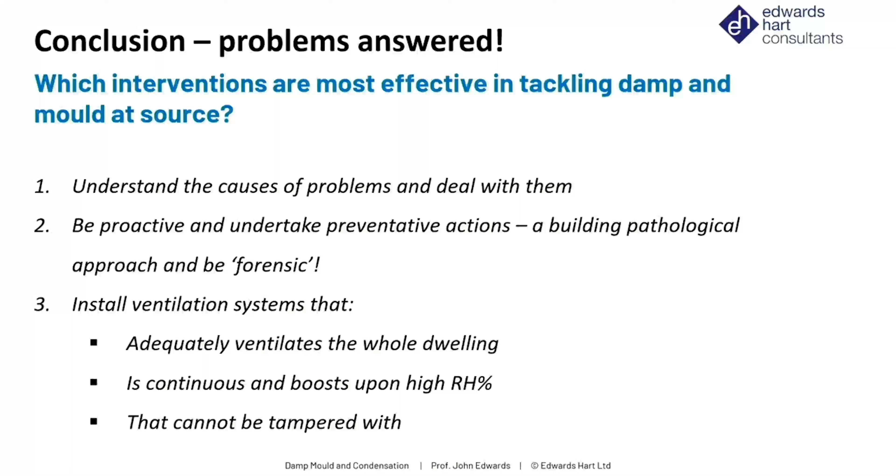And the third point is we need to install ventilation systems that adequately ventilate the whole building, not just the kitchen and the bathroom, but the whole building. Systems that contain continuous mechanical extract ventilation, but boost upon activation by humidistats when we've got high levels of relative humidity. And ventilation systems that cannot be tampered with.

And how can contractors and surveyors work more effectively with landlords to reduce the reoccurrence of mould? First point, all personnel need to be trained, qualified and competent. Second, working to robust protocols and tried and tested systems and processes. The third point, we need to have a continuous evaluation on what works and what doesn't work, and have a continuous perspective on learning lessons.

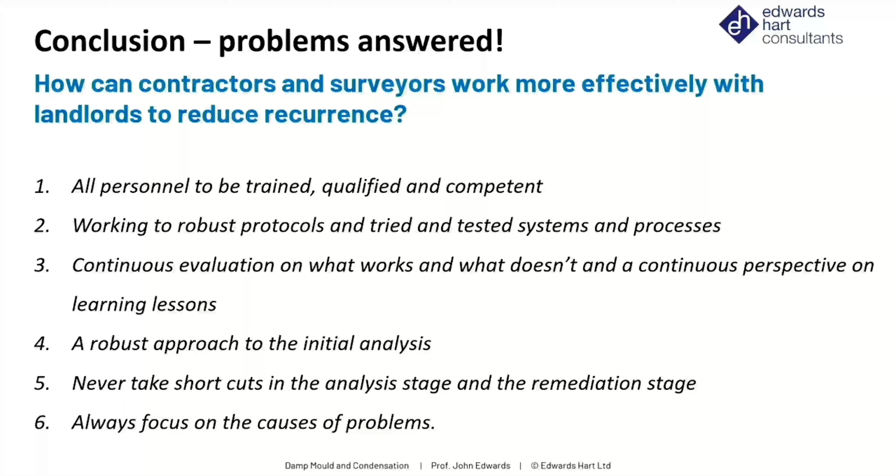The fourth point, we need a robust approach to the initial analysis of the problem. And that's why I showed you those 10 stages of the way in which we do that. And the fifth point, never take shortcuts in the analysis stage and the remediation stage. And finally, always focus on the causes of problems.

So in final conclusion, I think you've gathered that we need to know how to do this properly, right from the investigation, right through the implementation. And that means we've got to have competent people.

There are two training courses that I deliver. Both are available self-paced. But the first one is for people who are just going into buildings, and they may be going in for many different reasons, but not to investigate mould. They're just people who go into the building, and they're the eyes and ears of landlords to have their look. Also, people who work in housing association call centres do that course.

But the second course is the only course of its kind that has a specific focus on damp, mould and condensation that achieves an Ofqual government-approved qualification. Now, that's a two-day course, all delivered self-paced. And when individuals are obtaining a qualification, it means they have come up to that particular standard.

And I believe that when it comes to a person's liability and the person who's investigated the problem, they have to sign their name to it. If they've got those letters after their name indicating they have a specific qualification in this issue, I think when they're under the spotlight, they may have a little bit more credibility than they would otherwise.